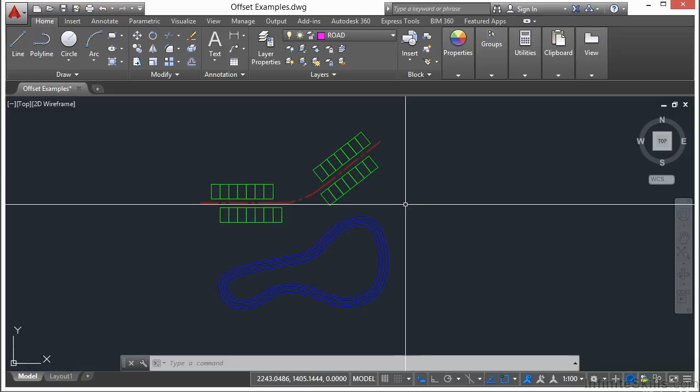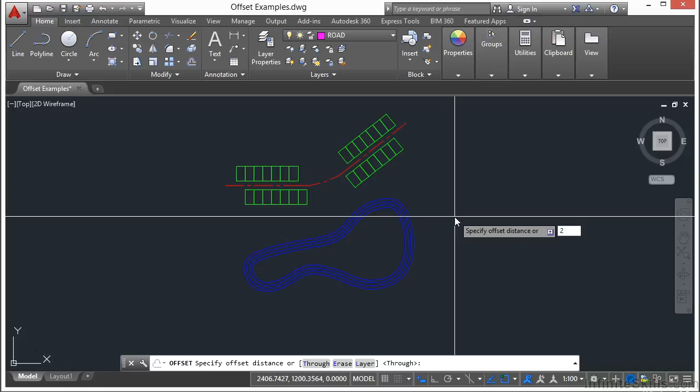First we start by starting the offset command. Type in the word offset, or type in the letter O for offset. Or you can go up to the Home tab on the ribbon, go to the Modify panel, and then go to the offset command. Either way, it starts off the same way. First of all, you want to type in a distance. In this case, I'm going to type in 20. Press return. Now let's select the object to offset.

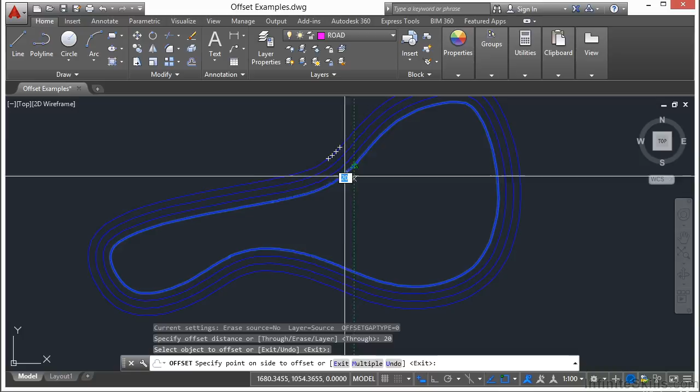I'm going to zoom in, pan around, and select this line right here. Now after you select the line, it starts right into the offset command, so you can see a little preview of where that new line is going to go. And I'm going to offset this line that I've selected by 20 units, either on the inside or on the outside of the line. Let me zoom in here a little bit closer. You can even see as I move my crosshairs around that I get that little dimension there, AutoCAD reminding me that, hey, you're offsetting this 20 units. And you get that little preview.

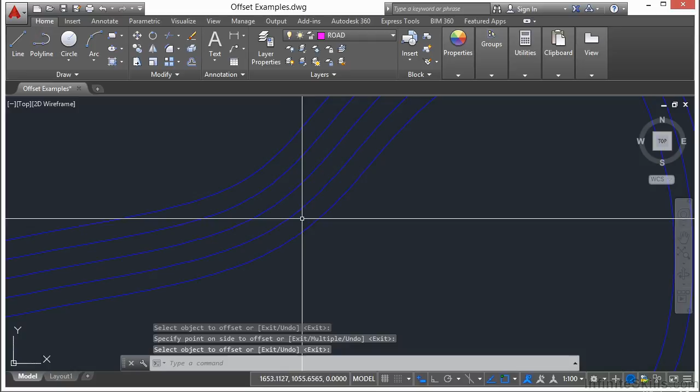Where the new line is going to be created relative to the original line depends on where you position your mouse according to that original line. So whichever side of the line you put it on, that's where it's going to go. So once you have your cursor in position, left click. And you have created a new line offset at 20 units. So if I measure an exact perpendicular distance from here to here, I am going to have two perfectly offset parallel lines that are 20 units apart all the way around. And it's actually that simple.

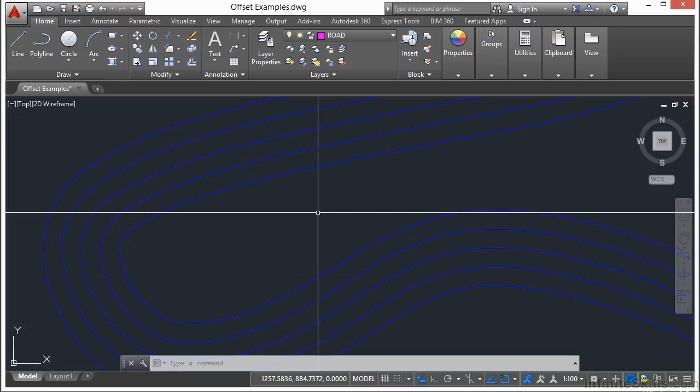So maybe you don't want to offset by a specific distance, but want the new line to pass through a specific point. So let's say you don't know what that distance is. You can do a couple of things. You can measure it, you can do the math, or you can guess, and then you can type in the distance. Well, the offset command has an option. So for example, let's scroll up to this little roadway. We have the center line, we have the lot lines. Let's say we want to put a new right-of-way line that parallels the center line, but matches up with the front of these lots. I don't know what that distance is.

So I'm going to start the offset command, press return, and you can see here that I have different options. Now these three options allow me to do different things. One is the layer. This way I can offset my new object and put it on a specific layer, which is actually a very nice thing because a lot of times I don't want it to go to the same layer. It's kind of like doing a copy command. You can see here when we did our contour line, it copied that old one. It left it on the same layer.

So I'm going to change the layer, type in L. I can say current or source. The source is the default setting for your offset command, and it just means it's going to match the object that you're offsetting. I'm going to switch it to current because currently I'm on the roadway layer. Okay, so now when I create this, it won't be this red center line. It'll be a magenta colored line.

And I can also pick an erase option. If I pick the erase option, which in this case I don't want to do, it will erase the original line and only create the new one. But now I want to offset through. So I type in T for through. I select my object to offset, which is my center line.

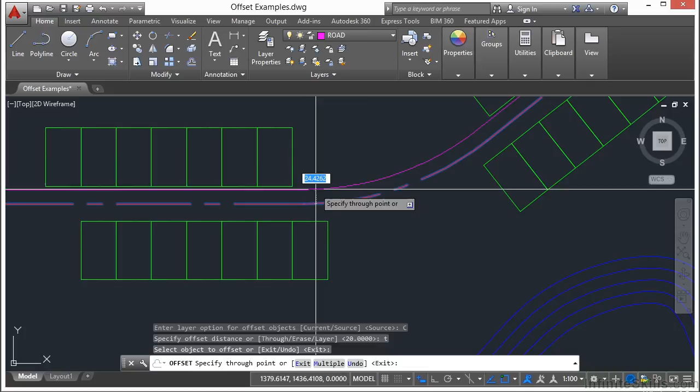And remember before I had to type in a distance? Well, you can see here now, I can still type in that distance. So I can kind of eyeball it and say, yeah, that looks about right, 80 feet or something. Or in this case, it looks like it's going to be more like 30. But that's not what I want to do. I just want to snap right to this point. I'm going to zoom in here. I'm going to snap to this endpoint, and there it is.

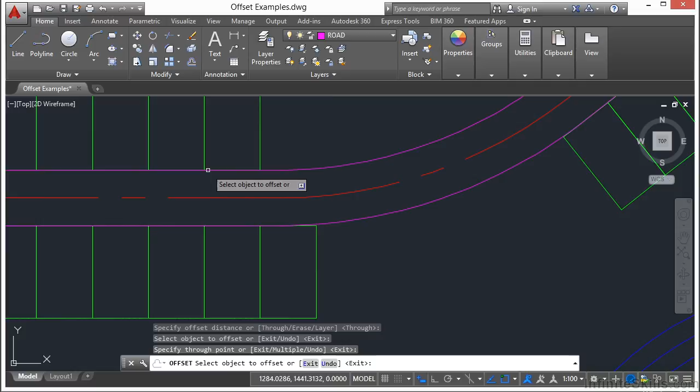So you can see the offset command is very useful, very quick, very easy to do. It can help you to create a lot of different things, especially if they're long parallel objects. You can offset a line, a polyline, polygon, an arc, or a circle. You can do all of those sorts of things.